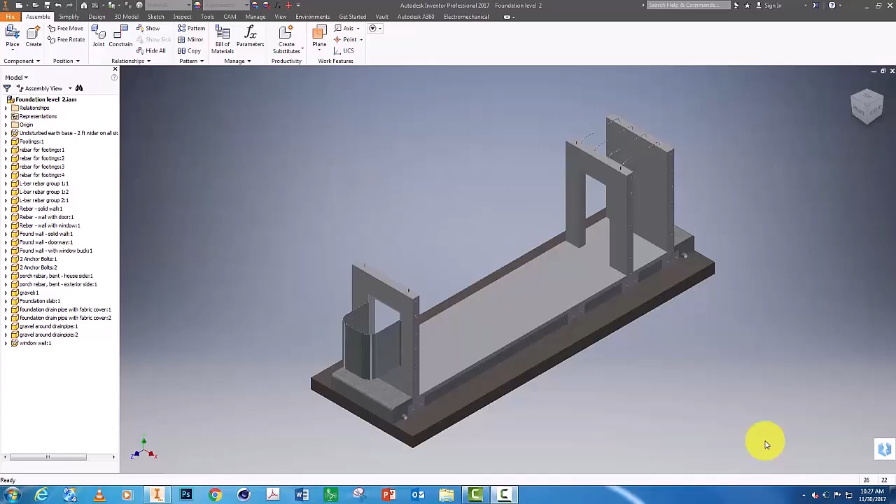We're now ready to start building the main floor that will sit on top of these foundation walls. First item to place is in a folder called Main Floor. We'll be working out of here now. Find Sill Plate 1, Redwood.

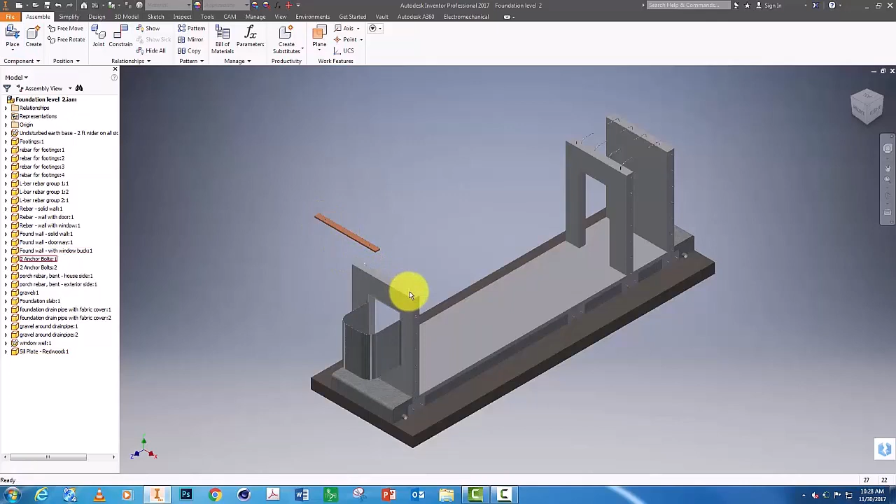The sill plate is the very bottom piece that goes right on the foundation wall. There's usually insulation put underneath it to help keep bugs and cold air out. It's made out of redwood. It could also be made out of pressure treated lumber, but it has to be something that is rot resistant.

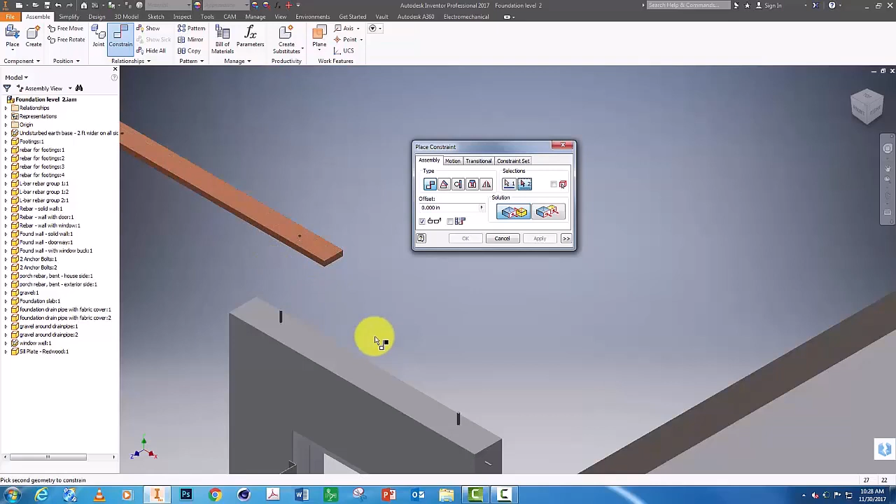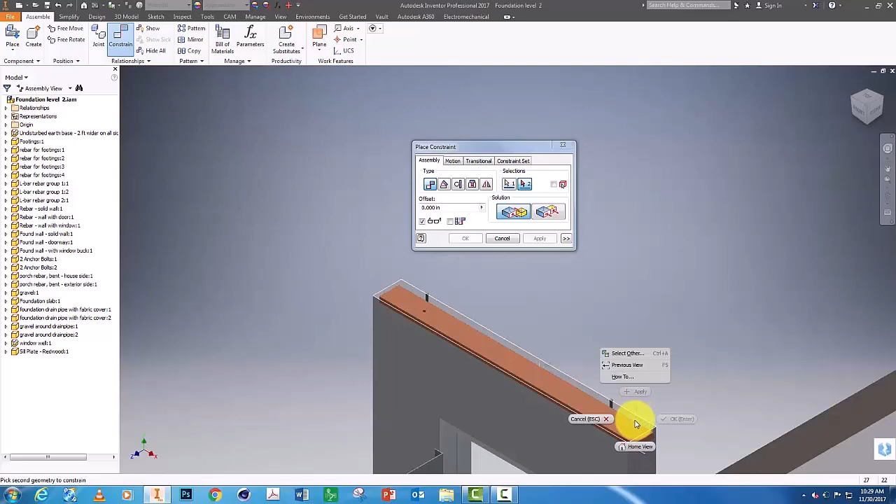Let's assemble this by first right clicking on the sill plate and choosing select other so that you select the bottom, and I'm going to constrain that to the top of this wall. Hit apply. Next I'm going to zoom in here and right click towards the back of this sill plate, select other so I can get that back face. I want to constrain that to the back of the foundation wall. Let's click flush and apply.

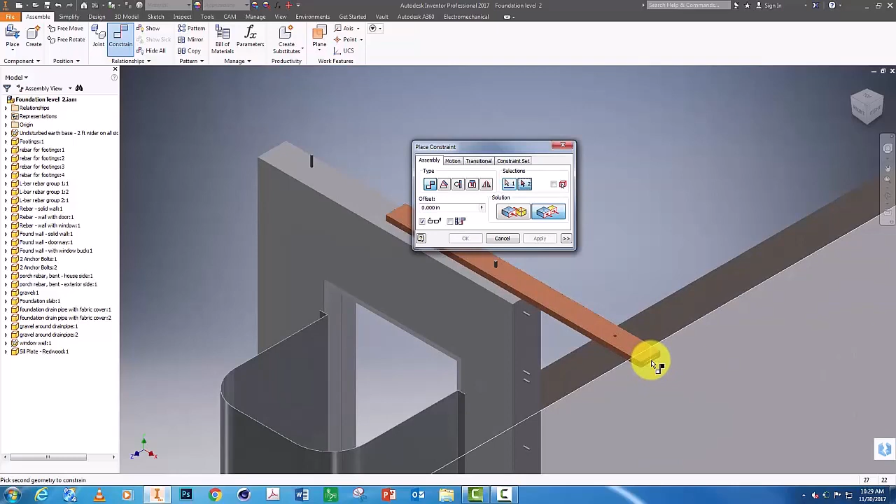Remember, this house is going to have some bricks sitting here on this edge of the foundation wall. Last constraint, let's do this end to foundation wall like that and click OK.

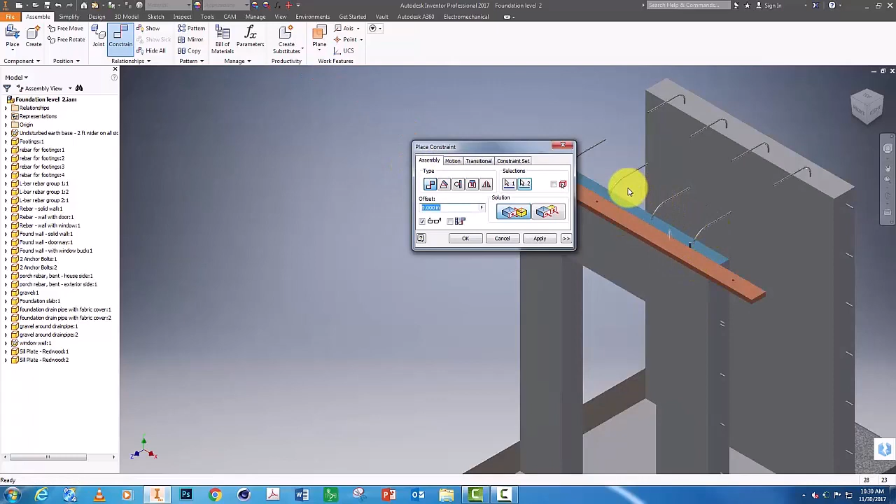Next, let's put on this sill plate, which is slightly different. Go to place, sill plate 2, and constrain it. Obviously the sill plate is not going to go on this outside edge. We're going to have our porch sitting there. So in this case we can constrain it like this. Let's hit flush, apply that. We want the sill plate to sit like that.

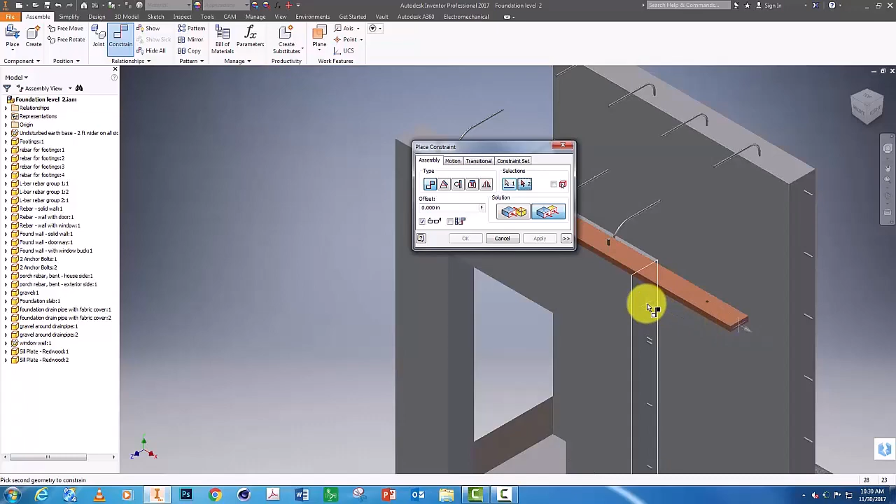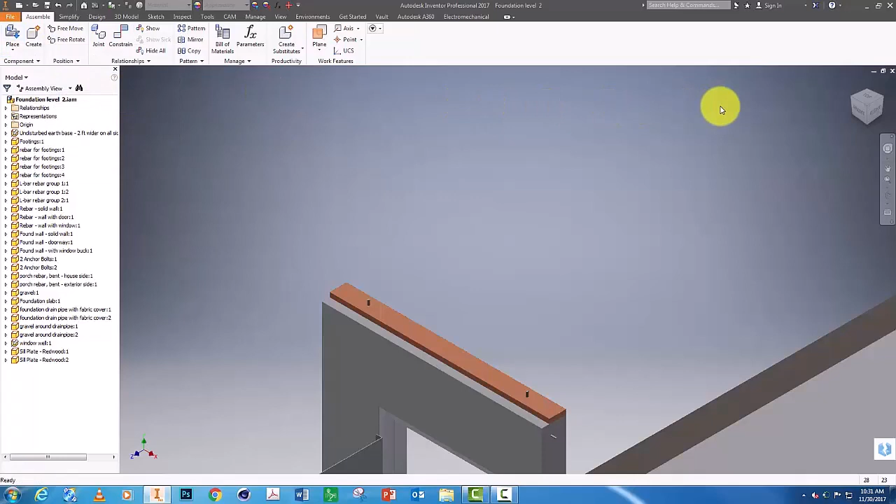Next, when a sill plate is put on a foundation wall, the holes are drilled and then it's fastened down with a nut and a washer. We're going to do something a little different at this point that we haven't done yet. I'm going to close and save my assembly and start a new assembly.

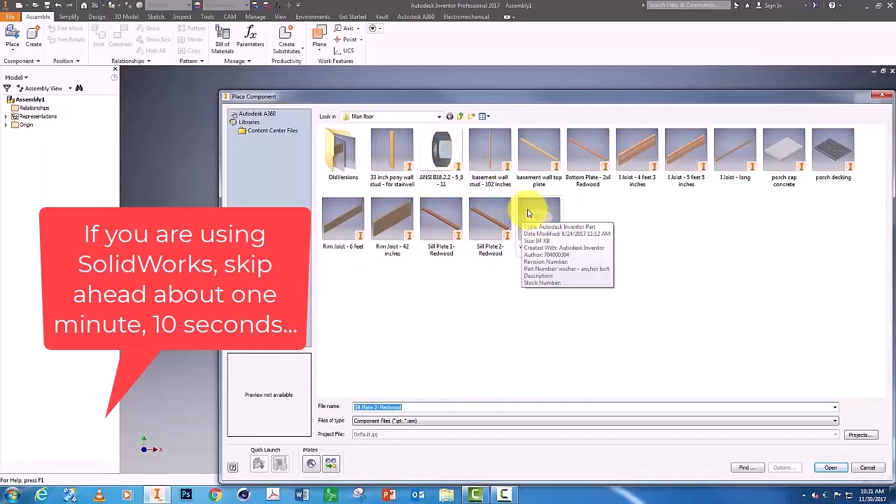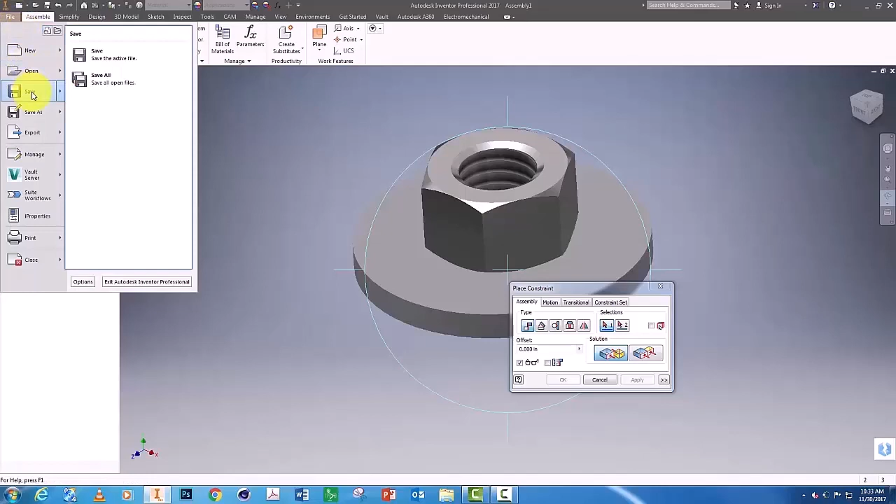I'm in the main floor folder, and I'm going to place a copy of this washer, one copy of that, and place a copy of this nut. I'd like to constrain these together. We'll start by mating this to the washer and apply that. Then our second constraint will be center line to center line, and apply that. Let's save this. Make sure you save it into your main floor folder, and let's call this nut and washer assembly. Click save. And now I can close that.

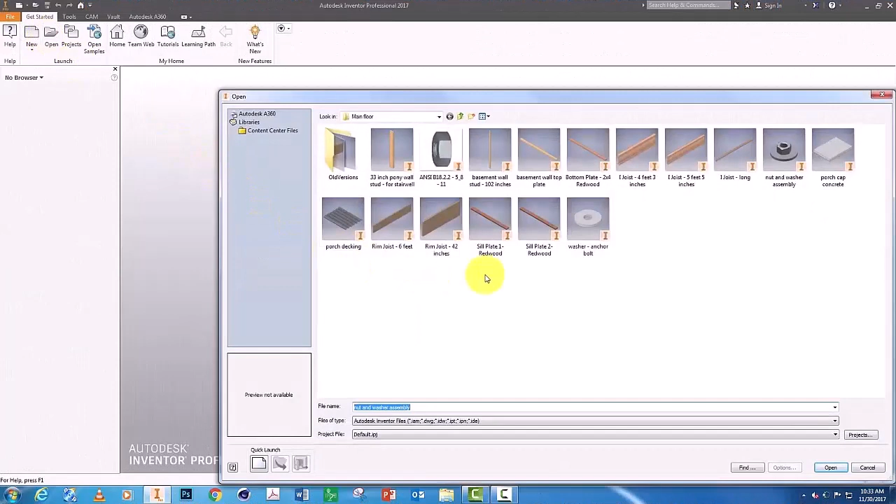And open my current foundation. If yours isn't saved exactly like mine, that's fine. Just make sure you save often. I've got old versions; this is my most current version. But now we can go to place and we can select that assembly.

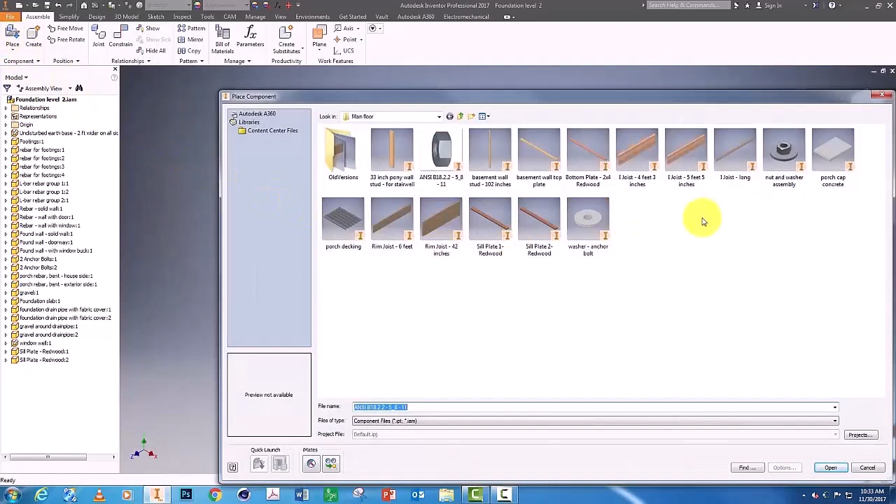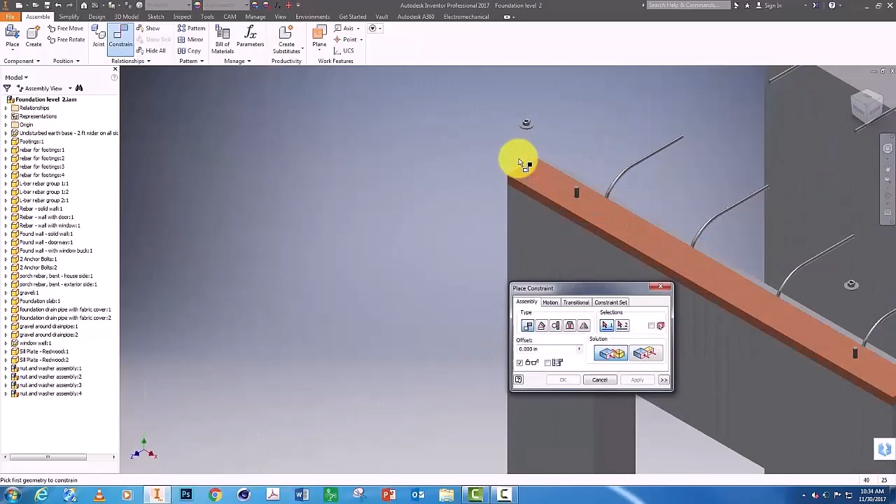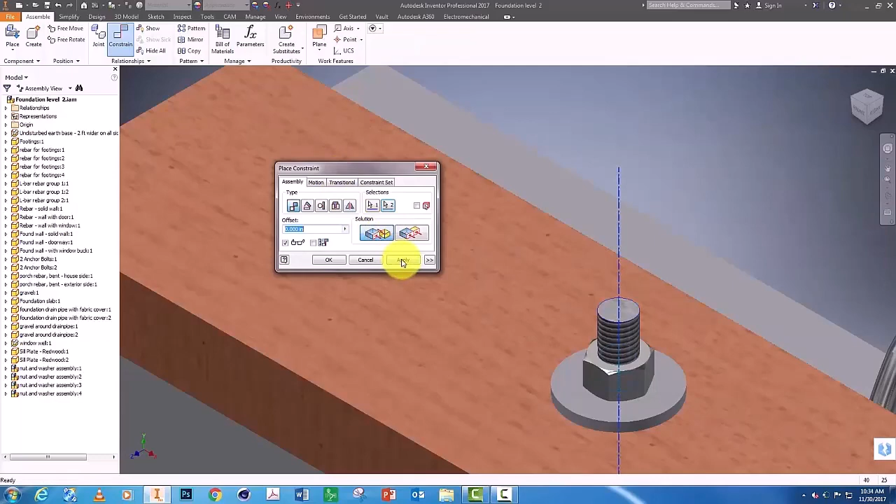This is called a sub-assembly in Inventor. Let's put two copies here and two copies up here, and we'll constrain those the same way we did previously. We need the bottom of the washer to the top of the sill plate, and then we need the center of the anchor bolt and the center of the sub-assembly, and apply. Please do that to the remaining three nut and washer sub-assemblies.